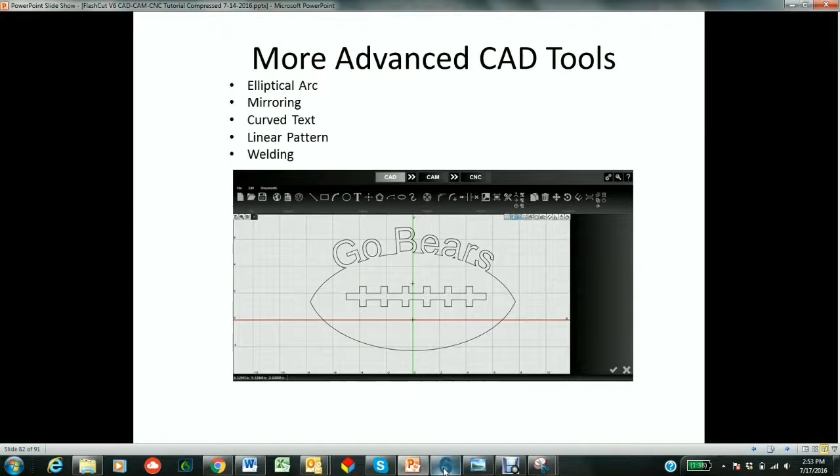In this lesson, we're going to talk about some more advanced CAD tools, such as an elliptical arc, mirroring, curved text, a linear pattern, and welding objects together. So let's get started here. We'll go to the software, and let's start with making an elliptical arc.

So we're going to make the center right at 0, 0. We'll make the major radius 8 and the minor radius 5. We'll make it start right around 10 degrees and finish right around 170. Now we can just go to the palette over here and just say we want exactly 10 and exactly 170 here. When we're done, we check it in. It looks good. Now let's mirror it to make the other side of the football.

So we're going to go to the mirroring tool. So first it says select the object that we want to mirror. Let's do this. It turns red, and we right click on it, and then let's say that we want to copy the object, so we actually make a copy of it. We'll go to the endpoint. Here is the start of the mirror line, and this endpoint is the end of the mirror line. And there we have our football shape, and when we're done, we just check it in.

It looks good. So now we're going to draw some text. So let's go to our text tool, and we'll do that. I already have written here that it says Go Bears, so we'll just put the text anywhere, and when we're done, we just check it, and we say we're done there.

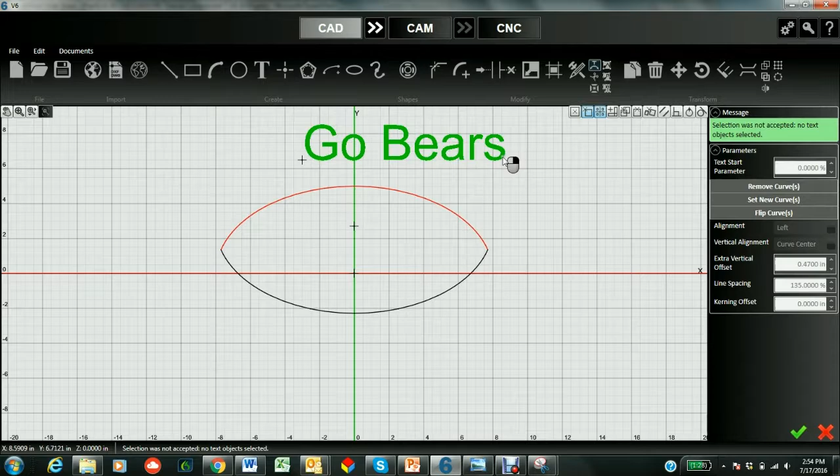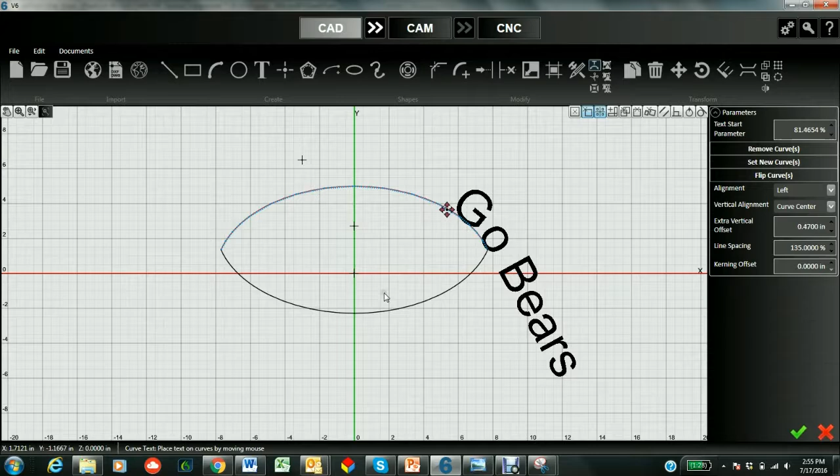Now let's go ahead and curve this on top of the football. So to do that, we're going to go to our curve text tool. We choose it. It says first we need to choose the text, so let's do that. And then we're going to select the curves. So let's do that. And there we go. So now we have the text Go Bears in here. And let's go ahead and flip it. So we can flip it, and we can put it on top of the football however we want.

And notice how we could also play with the offset. So I could have made it go higher or lower for even more intersection, and we can change the kerning, we can change the line spacing, and we could also change the alignment. So right now I'm in the curve center. I could have gone below the curve, I could have gone on the curve, above the curve. So let's just go back to the curve center and say that that's where we like it, and we check it in.

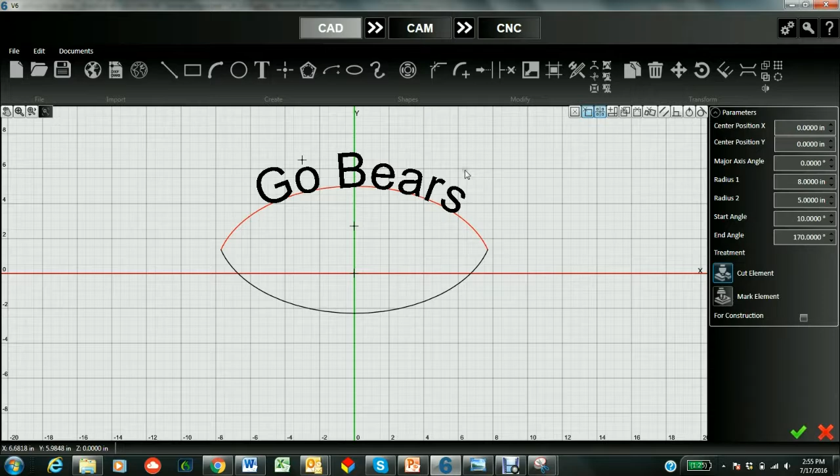Now if we look at this, we say, you know what, I want this font to change a little bit. We still have the ability to do that, so all we do is we click on the text, and let's say we just want to make it bold. So we just do that, and now it's larger, and we check that in. And if we want to change the location of it, we can go back to the curved text and center it a little bit better.

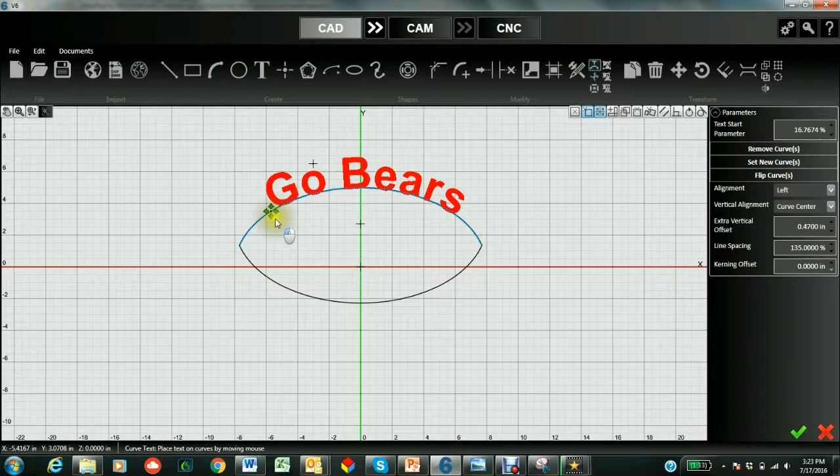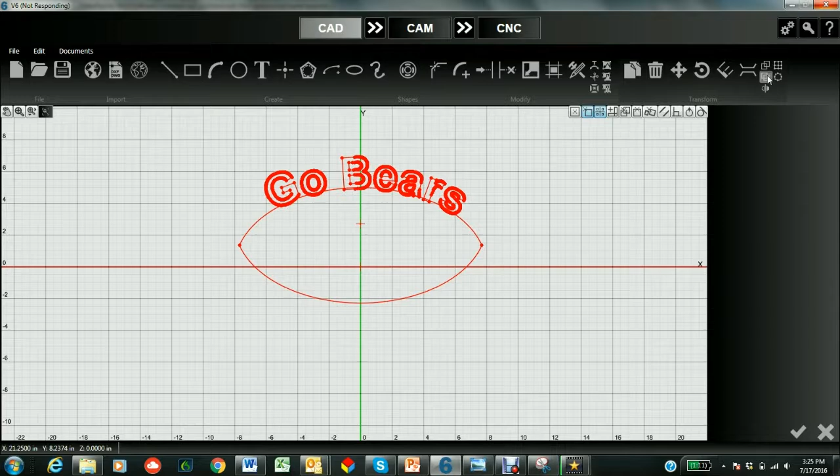Now we explode the text, and then we want to go to the welding tool. So before we do that, we're going to select everything. We're going to weld the selected entities. We're going to combine all the letters with the football, so it's all one entity, like that.

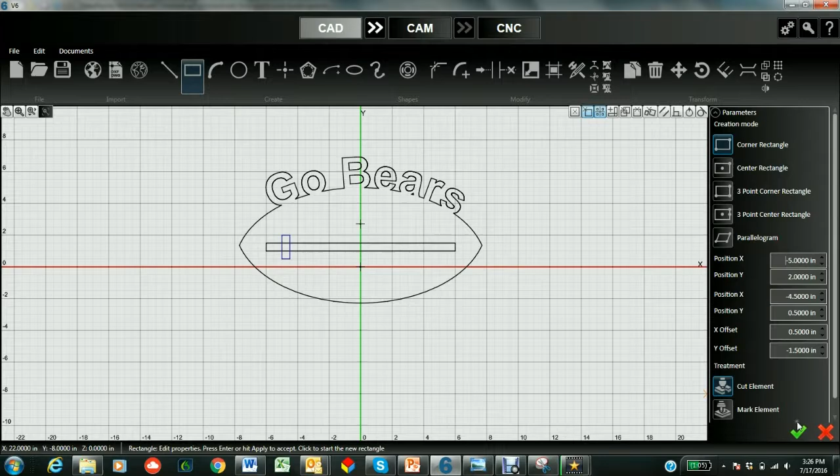Then we can draw some laces on the football. So let's just go to our rectangle tool, and we'll just draw a lace right there. So we have a lace there. Draw another lace right there. And then instead of just drawing a bunch of new rectangles, what we're going to do is select that rectangle. So we're going to use the Alt tool so we can chain around it.

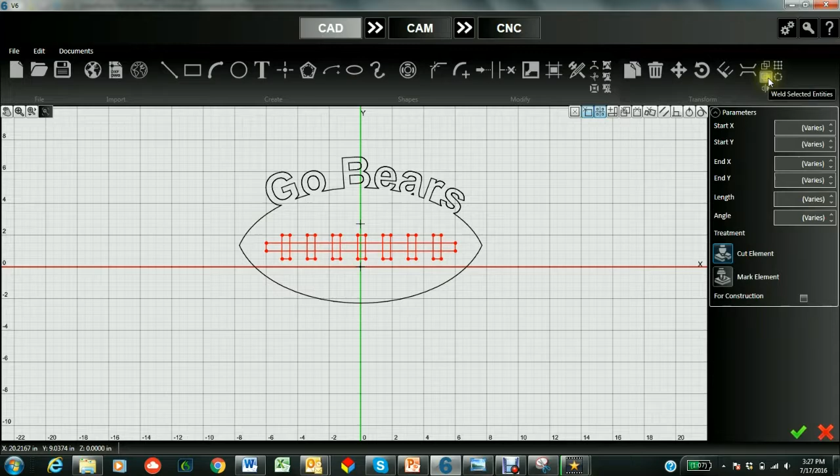And then we're going to use the linear pattern. So go to the linear pattern, and it defaults to 1 inch and a count of 2, so let's see. Let's up it. So we're happy with it, and that looks pretty good. Then we'll check that in. And now we can weld this too. So let's go ahead and choose all the laces and use the Weld Entities tool. And they're all welded.

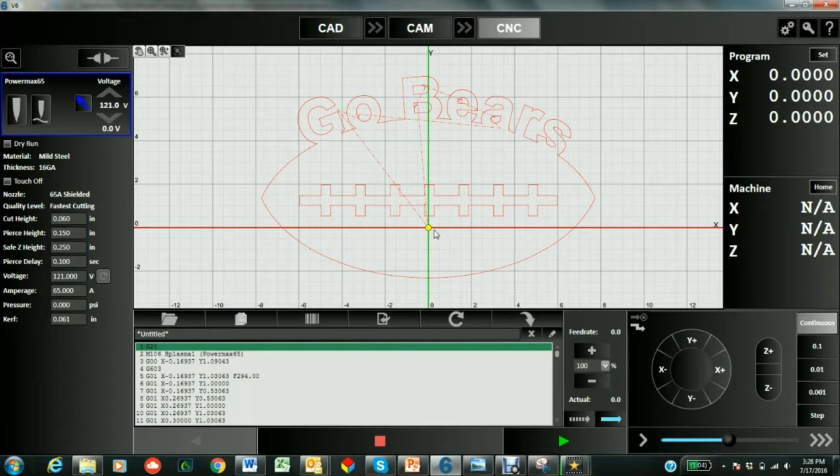So now we are ready to cut the football. We're going to just go right into CAM, and it's going to create a tool path for us. And there we are. So we can just go ahead and create the tool path. If we like it and we're ready to cut, we throw that over to CNC, and there's all of our G code for our football. So that goes over some of the advanced features such as curvy text, elliptical arc, mirroring, and the linear grid function, and also the welding.